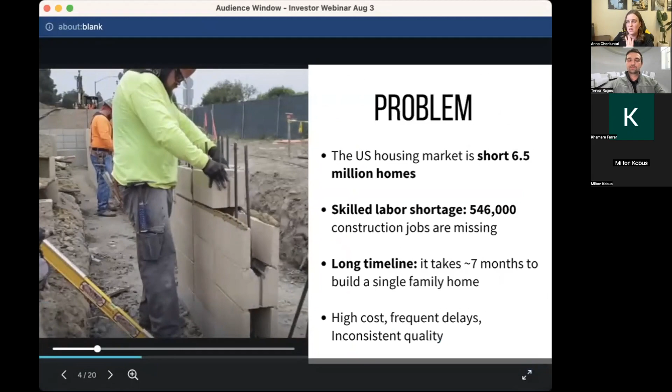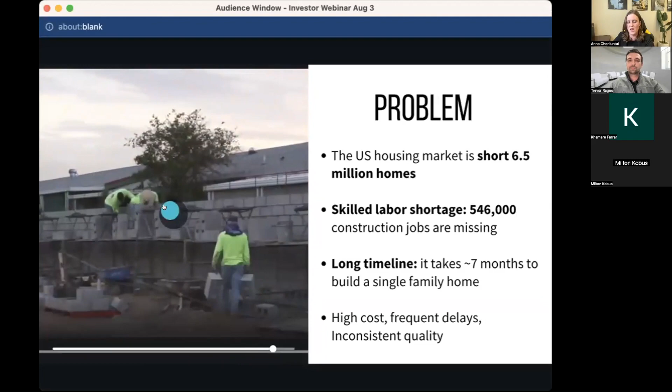Now briefly about the problem, which I believe you're all familiar with: traditional construction technology takes a lot of time, has inconsistent quality, and heavily relies on skilled labor. Home builders really struggle to consistently have available trades on site - they may have 10 people working today, but nobody shows up tomorrow or even picks up the phone. So they constantly battle this inconsistent construction flow and process. We believe there has to be a better solution.

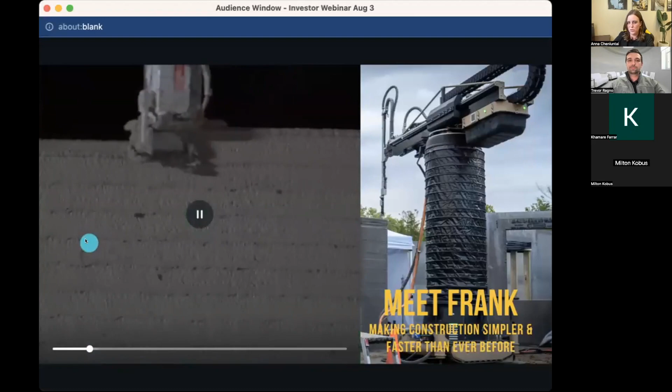This is why we created Frank. Frank is the construction 3D printer, which is highly mobile, very transportable, and only one person is needed to operate Frank and Gary - Gary being our proprietary mixer. We name all of the robots we create: we have Frank, Gary, and Mary.

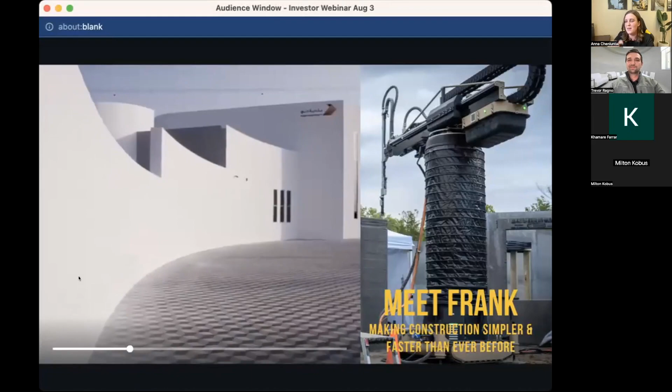Mary, it's a big bulk truck that delivers the material to the construction site.

Using our tech, we 3D printed the Guinness World Record building. It's a 2-story large administrative building, and nobody still can beat this Guinness World Record.

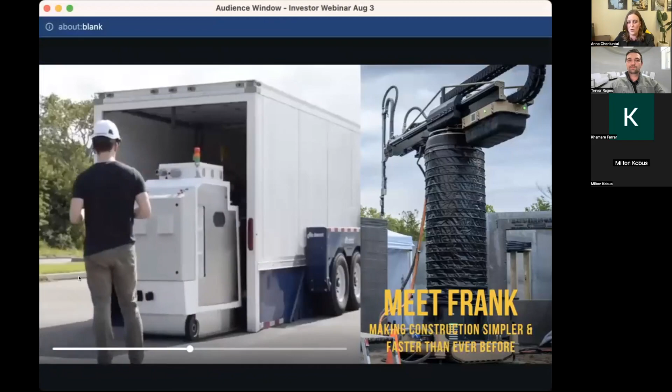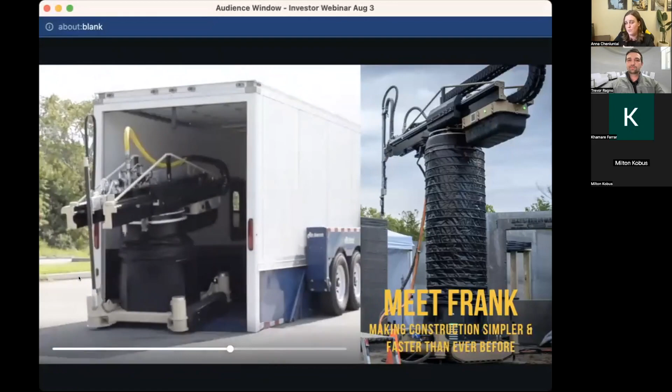Here you also can see how easy Frank and Gary can be deployed and transported using a regular pickup truck and trailer. Just one person is needed to do that, using the joystick and iPad. This is something that fundamentally differentiates us from all other solutions on the market.

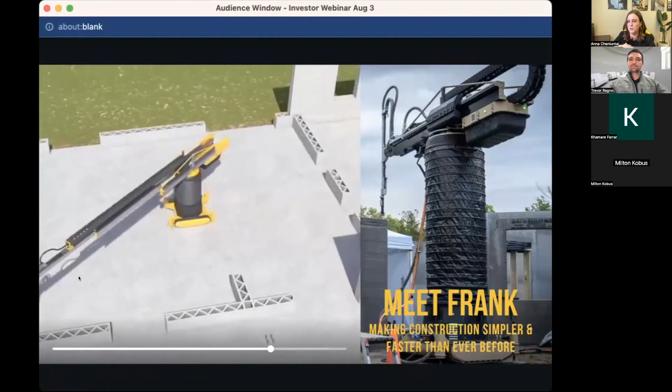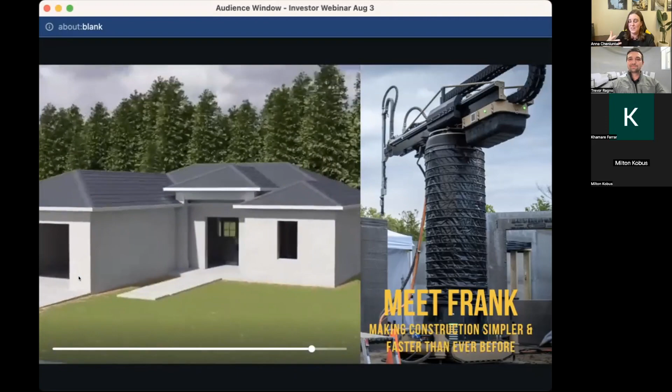Here you see how modular the 3D printer is. Basically, there's no such thing as a problem size-wise. This is a big building for Frank - it could be a 1,000 square foot building or a 10,000 square foot building. Frank can 3D print any of that, due to the mobility and how agile the system is that we created.

Using our solution, home builders significantly reduce the need for labor. It's one person to operate Frank and Gary instead of a 10-person crew on site. More importantly, Frank is available every day, 24/7, and Frank does not cancel the job.

The houses can be way more affordable to build. We estimate up to 20% cost savings for a finished house using our system. And it can be faster - we estimate it's going to be 2 months to complete the house instead of the 7 months it takes right now using traditional construction methods. And it's consistent quality, zero waste, and less logistics.

All of these numbers are really applicable for our solution specifically, because of how easy the printer we developed is to use - and Trevor is going to tell more about this - across all of the items of the costs of operating and using our system.

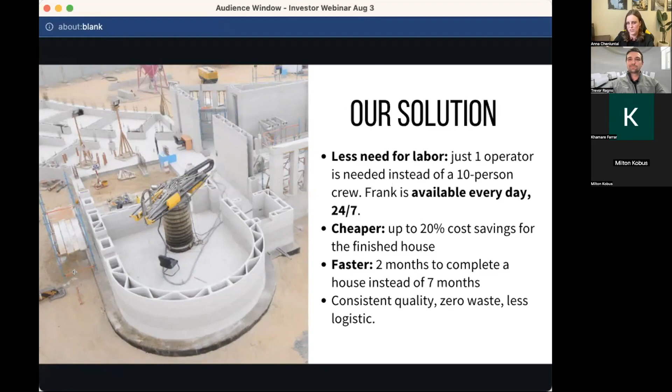Here you see the Guinness World Record building and another building we 3D printed in Florida. Throughout our journey, we built and developed almost four iterations of Frank. The old Frank was really big and bulky and not that mobile, but it still 3D printed the Guinness World Record. On the right you see the most advanced and recent version of Frank, which right now is actually on the market for home builders.

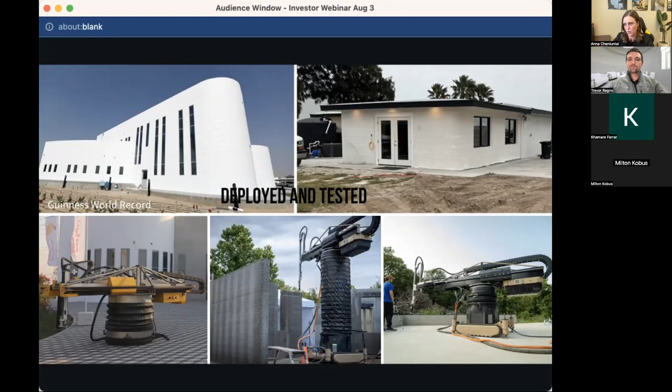Our business model is that we position ourselves as a technology provider for home builders. We are in a B2B business model, and in a nutshell, it's basically the razors and blades business model on steroids. What does that mean? We provide robots for renting, and then we sell our 3D print material for users of our 3D printers. Robots are razors, and 3D print material is blades.

Just estimating the market for this specific business model, it's going to be more than a $60 billion market opportunity for our specific technology and business model. How we calculated it: we basically saw how many residential houses are built annually in the United States. Let's assume all of them would be 3D printed - that would be the market opportunity for us.

Then we saw how many active home builders and construction businesses exist today in the United States, and we multiplied that by annual rental. That would be the market opportunity for us just for the robot rental.

Now hear more about the 3D print material and the goal for this business model, how we're going to achieve specific milestones by 2027. Our goal is to have 400 printers in operation, and we know the conservative productivity of each printer. If all of these printers work even 8 hours per day, they will need 3 billion pounds of 3D print material annually. That equals 20,000 single family houses, which is just a fraction of the current market in the United States - about 1.5% of the single family construction market today.

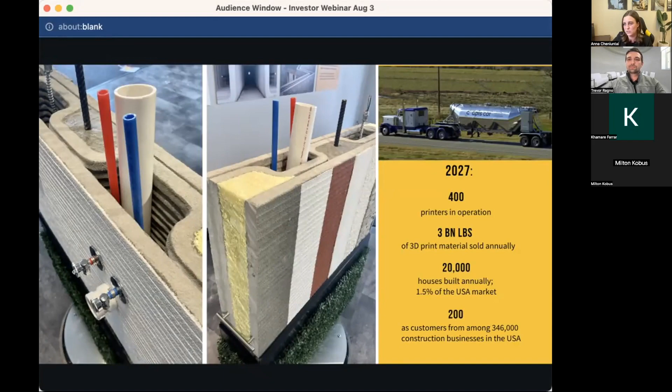To achieve that, we will need 200 home builders actively using our printers, considering each of them using 2 printers. However, we already do have potential customers who want to purchase 10 printers, so even to achieve these numbers, we may need an even smaller number of home builders actively using our system.

And 3D print material - I know a lot of people want to know what 3D print material is and how different it is. It's basically concrete-like material, but it's not the concrete you see poured on construction sites, on construction slabs, or on roads. That material is basically a puddle - it's very liquid, and it cannot be extruded.

Our 3D print material is basically a proprietary blend: sand, cement, and secret sauce, as we call it. Secret sauce is the combination of components that makes the material extrudable, printable, and also gives it all the physical properties required by building codes. This secret sauce consists of existing components already used in concrete and construction. The magic behind this is basically what exact components you use and what the ratio between them is.

Because sometimes if you add some of the components, let's say 1%, and then add 1% more, the entire material is going to look completely different, and you will not be able to print. So there's quite significant material science behind that, and we're really proud that we spent a lot of time to figure out the best formula for this.

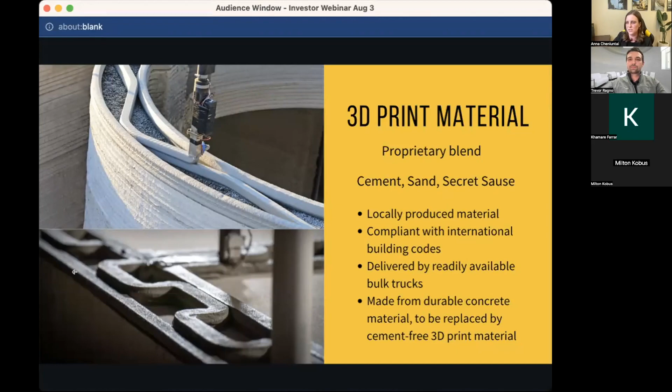We accumulated significant experience in that. And in the future, we even plan to transition to cement-free materials. We already tested it, and that will allow us to reduce the carbon emissions and CO2 emissions during the construction process.

I also know some of you asked how the user is going to make money and why it makes sense to introduce 3D printed walls. Basically, the construction of the walls can contribute to almost 40% of the overall cost of the house. That includes all of the labor, all of the materials, concrete blocks or other materials just to build the wall, then the reinforcement, insulation, all of the stucco, all of the paint, everything just to get the wall that people want to live in — not just the ugly concrete wall.

Using our technology, we can reduce the cost just to build the walls by up to 46%. And that will contribute to overall cost savings of up to 20%. I'm saying 'up to' because it really depends on the design, on the location, on what systems you want to use, what finishes you want to use. This is really generic and average, but it provides a big picture of how the economics of walls play a role in the overall cost to build a house.

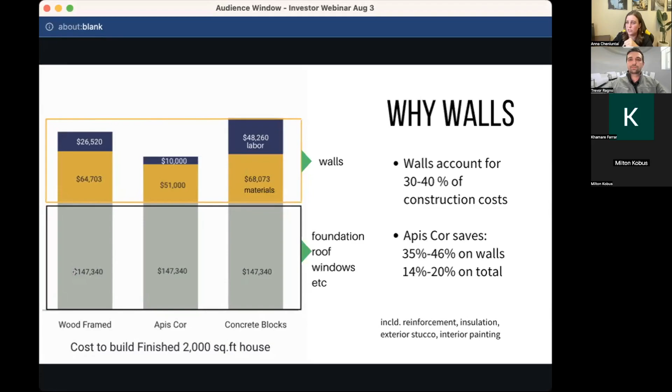Again, these numbers only apply to us, to our technology, because first of all, on the left is the quality of walls that we print, and you can see how straight it is. We don't have these sausages and all the grooves between sausages. On the right, for example, you see walls that other technologies mostly print — and it's not even the most ugly walls that exist today in the industry.

When you have all these grooves and big layers, first of all, you need to spend way more materials and labor just to smooth out the walls, because you need to fill all the grooves with stucco — you can use even 3 times more stucco than needed for our wall, for example. And then you spend way more 3D print material — you can see how big the layers are on the right pictures. Our material, our layer, is very compact.

Because we're really fighting a lot over the economics, a lot of numbers and money, on how to save on the 3D printed wall. The goal is not just to pour a lot of material, but how to actually use less material while still having a structurally safe and sound wall. So there's a lot of engineering behind the actual wall and what the material is and how big the layer should be.

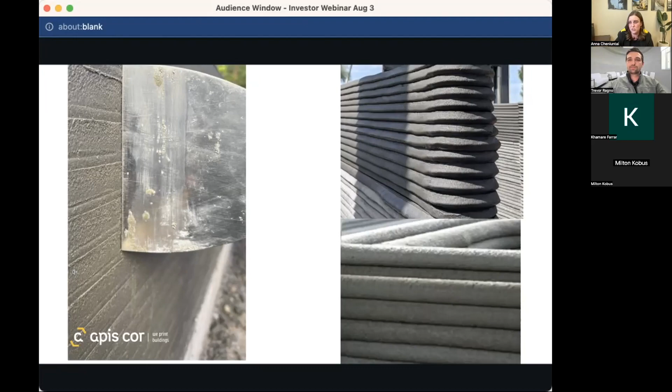That actually works, but the economics behind this is completely expensive because you need about 3 18-wheelers just to deliver parts of this gantry printer, and then about 10 days, sometimes even 14 days, and about 10 people just to assemble this together and get the system up and running. I'll leave it to Trevor to tell more about this, but I just wanted to demonstrate how much smaller our system is compared to other systems.

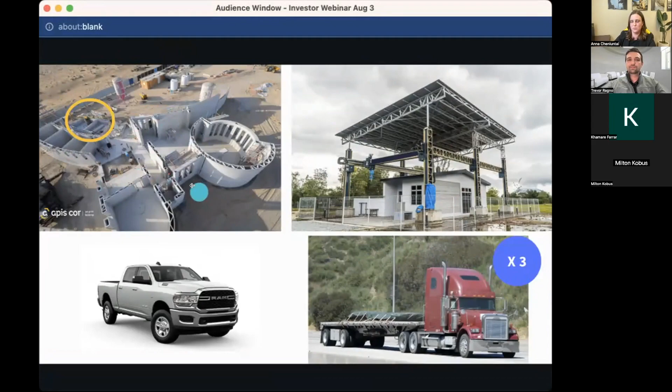And again, for our Frank, we could even 3D print a building 10 times bigger like this because we just move the printer and keep printing the walls.

And I'm sorry for the sound. I'm going to show you the... Trevor, is it very loud? I don't hear very much on my end. That's fine, I think we can get the idea here.

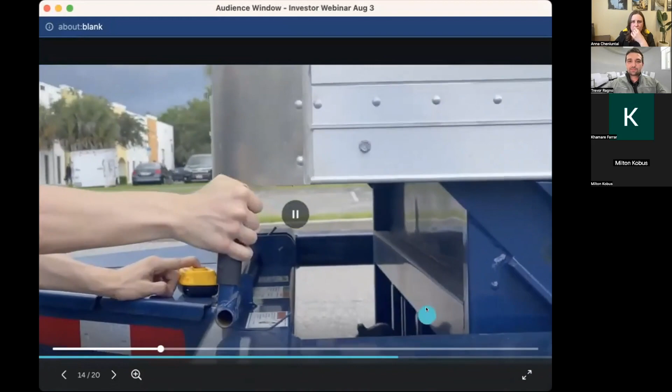Yeah, on mine the video looks a little stop and start, but essentially this is just a consistent timeline showing what it looks like to get out of the car, unload the mixer, and unload the printer.

So, basically, because I forgot to turn off the sound, I don't want you to be overwhelmed with the video. This video shows how Frank and Gary transported by pickup truck and trailer can be easily unloaded by one person using the iPad you see right now on the screen. So we'll just keep watching this video, but it really provides the idea of how agile, compact, and easy everything is with Frank and Gary. And you can see that they're all mobile.

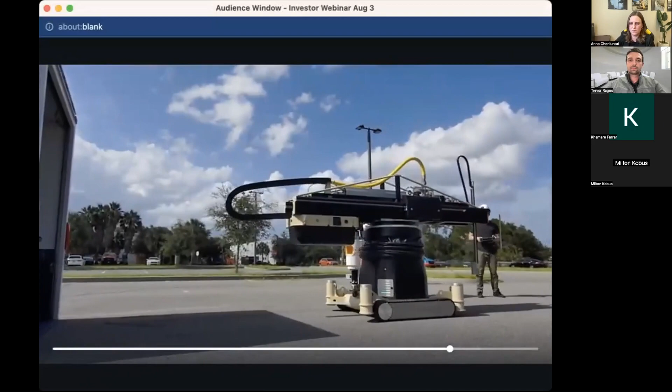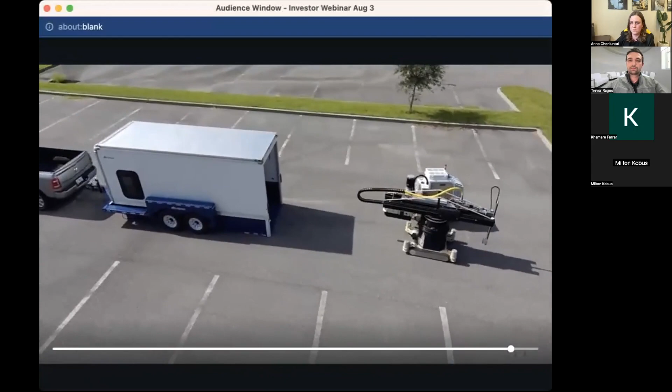Yeah, so that's basically everything an operator or home builder will need to use our system. And these two small and compact little tanks can 3D print walls of any size of the building. I think that's really fascinating — it's a tool that you can easily use to build buildings.

It's not like this heavy gantry, something that makes the cost to build a house 10 times more expensive. It does not make sense at all. So you can see how different we are.

And hear more about our company updates. So first of all, about sales and product presentation.

As you may know, we started our commercial launch in late January this year. We started offering Frank and Gary for sale to home builders in the United States and worldwide. The interest and demand was very overwhelming. We already made 2 sales, and we sell Frank at $650,000.

We also collected 26, and today it's even more, paid reservations for Frank and Gary. Each reservation costs $3,000. So it's not just empty promises — people actually want to purchase the Frank and Gary at this price with this lead time.

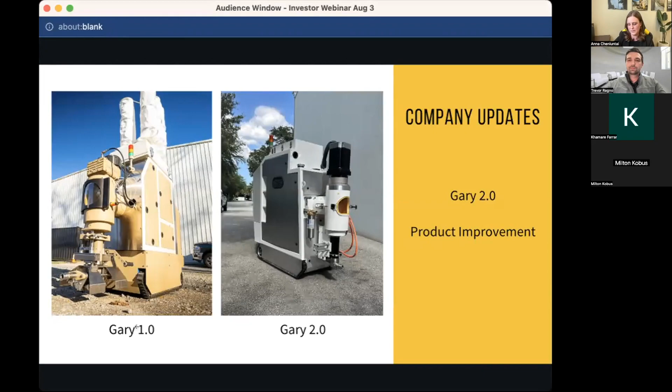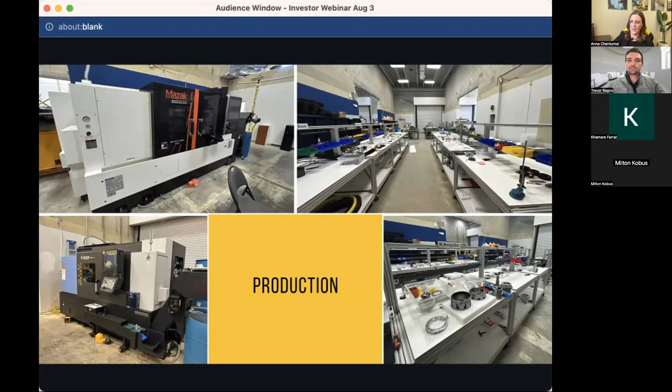Our production facility has significantly expanded — our pilot manufacturing facility here in Melbourne, Florida. We got a couple of brand new CNC machines and a lot of tools. We improved our space because we're preparing to manufacture more printers. All the investments we raised so far were really instrumental to get this done, and we're really excited about expanding our manufacturing capabilities.

What's going to happen next? We're currently working on building our model house. After the model house, we're going to build more pilot projects with home builders, our early adopters, in Texas, Florida, Louisiana, California, Montana, and South Dakota.

But the model home is first before we go into anything else. It's about 5 minutes from our headquarters, and we're going to test a lot of different techniques and improvements there. After that, we'll be ready to print houses without any stops — that's our goal.

With the model home, we're almost done with the building permit. Some of the hurdles were really hard to believe — it was the septic permit, and Trevor will tell more about that. It's not even about the 3D printed walls or technology, it was really septic permits. We spent maybe 3 weeks figuring out how to make it happen, but we solved it — just a couple of last papers we're waiting for, and hopefully we'll get our building permit soon.

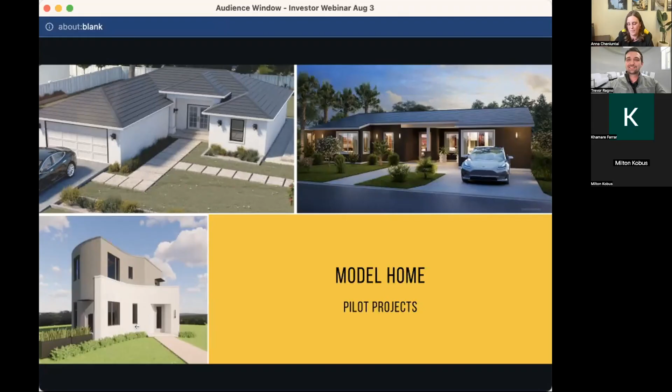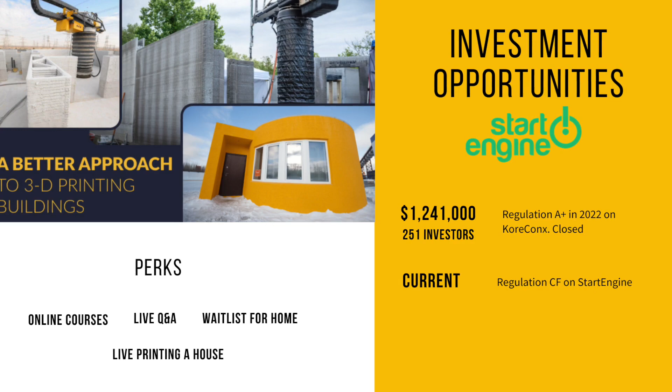Right now we have Regulation CF on StartEngine. Thank you all who invested in us and believed in our vision — that really means a lot for us. If you invest, we have a bunch of really cool perks: free online courses, live Q&A with me and Trevor, kind of different from the webinars. We also add you to a wait list for a home at no cost — it normally costs $200, but investors at a specific tier get it for free. And for a very high tier of investment, you'll be invited to the live printing of a house.

So that's basically it, what I wanted to share — company updates about us. Now I'm going to pass it to Trevor, and he's going to talk more about the technology and the competition, things I maybe touched on slightly, but Trevor will tell it in a more compelling way.

Well, I'm not sure about more compelling, but I'll certainly make sure we can cover some of our bases on those really popular questions people have. Thanks so much for the introduction there, Anna.

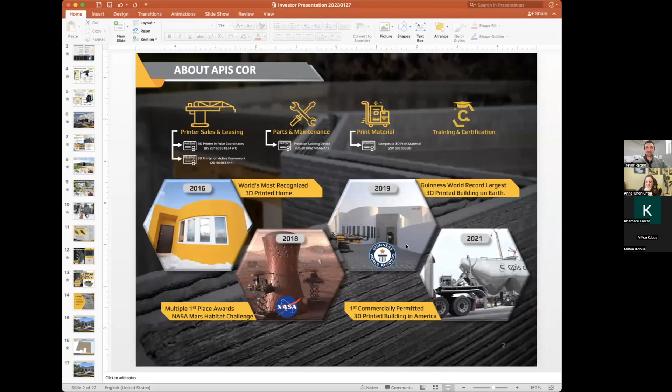Right off the bat, if you've been following us for a while, you might be familiar with some of our projects, things like one of the world's most recognized 3D printed homes. We've really been involved with NASA, one reason why we're here in the Space Coast. We've won multiple first place awards at the NASA Mars Habitat Challenges.

Anna touched on the Guinness World Record that we set back in 2019. But things like having the first commercially permitted 3D printed building in America really show that we're able to get traction, get permitted, and get deployed pretty easily.

Of course, we have some patents you can learn more about on our website, or check it out on USPTO. We'll talk about that in a bit, but just want to make sure we have people in this meeting with different levels of knowledge about construction, how it's done now and how we do it.

So just to make sure we're on equal footing, looking at traditional construction, something I definitely experienced out in the field a lot was human error. Human error is one of those things that's pretty inevitable, and it's pretty expensive. When you build something and have to demolish it, you've wasted your time, you've wasted your labor.

And if you don't demolish it, and you continue working around walls that aren't perfectly straight or plumb, it really affects every other contractor down the line. Your flooring guy has to make adjustments. When you're doing baseboards, crown molding, kitchen cabinets, drywall, and everything else, every other contractor is making adjustments. And that requires an extra level of skill.

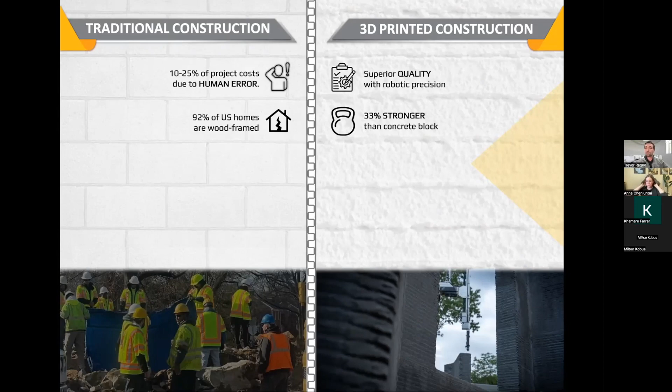We here in Florida are really big fans of concrete because of the extreme weather events we experience, and because of savings in terms of maintenance and HVAC. So we build out of something that's essentially a high strength mortar or concrete. It's about 33% stronger than concrete block homes already on the market. So something that's really great for those home buyers.

As a builder, delays are one of those things that everybody's facing, especially in a post-COVID world. Right now, median delays out in construction sites are up to and around 200 days. So not only are you able to build faster with a printer, but even more importantly, you're able to know before you ever step foot on the construction site how long it's going to take to build that home down to the second.

We know exactly what these printers are going to be doing while they're out there. So this makes it really easy to schedule those subcontractors and keep construction moving, and ultimately just reduce risk to your timeline and your budget.

Now, there's definitely a lot of environmental concerns around the construction industry. Part of that's because construction and demolition waste is by far the largest contributor to landfills. So using a technology that's not reductive, you aren't cutting 2x4s and sheets of plywood. You're adding only the material that you need. So it's zero waste, it's all electric, and the material we're using, including the steel reinforcement, is fully recyclable material. So definitely something that can help create a greener home.

And one of my favorite things here on the design side is this architectural freedom. You see a lot of homes out there with straight lines and hard corners, and that's not because there's a lot of straight lines and hard corners in nature, or because we just like them more. It's mainly because that's how the materials come—your straight 2x4s, your straight pieces of lumber, your square blocks.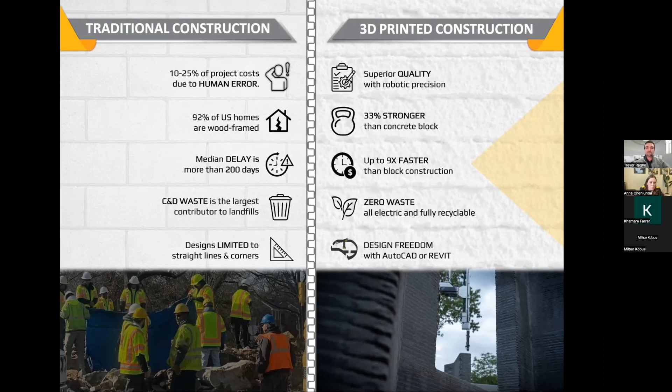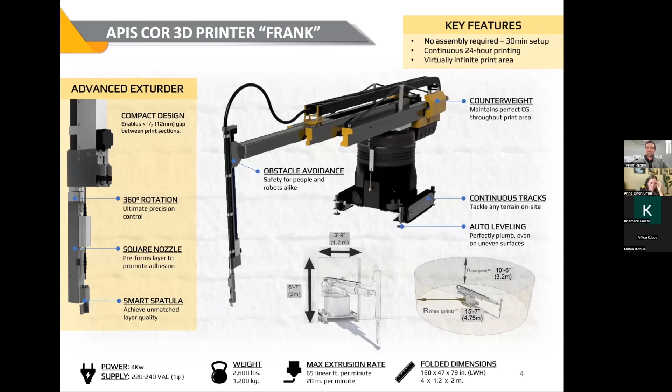Here's a little bit more on Gary. Gary is this mixing machine that we use, and most of the industry out there, they're using plastering machines. These have been around in construction for a while. It's something that's a massive headache to use. Creating our own mixing machine was a real way to avoid having to use these. They're expensive, extremely difficult to clean, and they need to be cleaned very often. We often have to use things like sledgehammers to break off cavity pumps and actually get them open and clean them.

So moving over to a technology that now, the Gary 2.0, kind of the second generation, has really helped us because the mixer is the brains of the operation. The printer gets all the glory, but at the end of the day, the printer's only as good as the material that's going to it. So having Gary constantly monitoring the water temperature, the environmental conditions, the print speed, Gary is really the brains of the operation, telling the printer what to do and anticipating what's going to happen before it even gets there. So these are some of the reasons why the quality of the wall is so high.

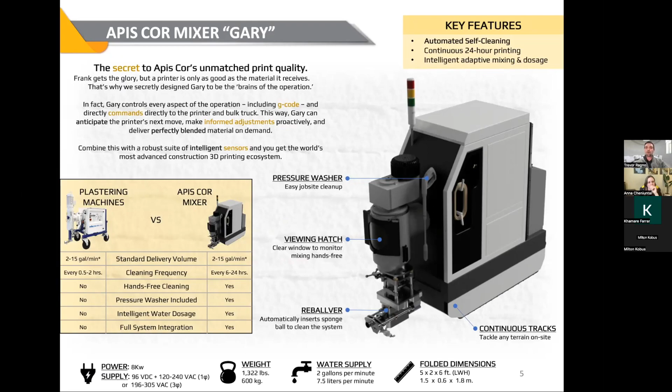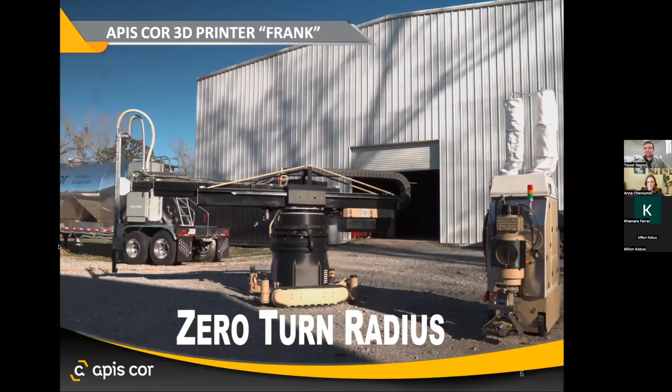So here's Frank in action. You can see him on his continuous tracks driving around. And here we're seeing things like cutting some very tight corners. The spatula helps us to do that. I know some people are a fan of curved walls, and some people just want something that looks exactly like everything they've seen before. You can do really both with the printer. And of course, the consistency of the walls is something that really stands out in the industry.

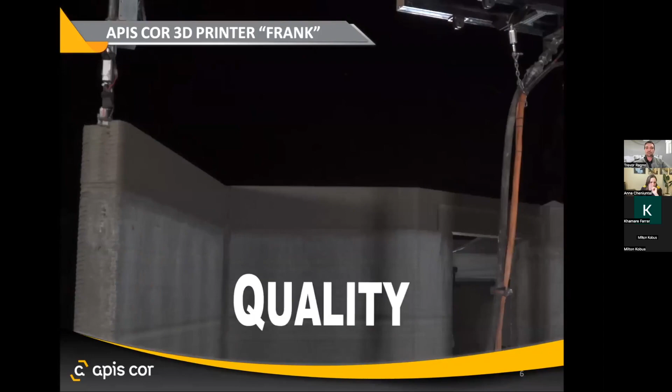Let's see what we have here.

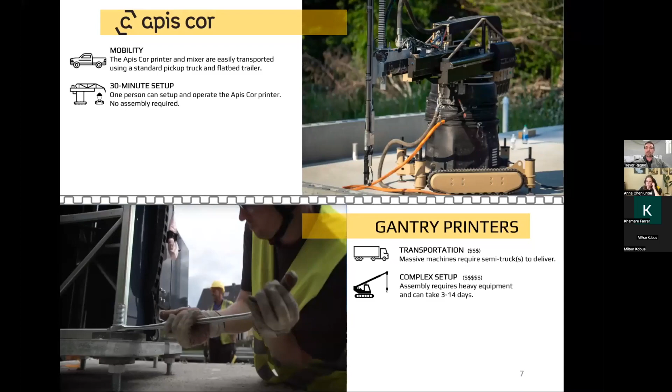Anna touched on gantry printers briefly earlier. 3D printing right now and for the foreseeable future is a really hot technology in the construction industry. There are other companies in the space, but the vast majority of them, like some of the ones mentioned earlier in the question, are mostly gantry printers. Again, massive machines, very expensive to transport compared to a more mobile technology. That setup time for gantry printers, not only is it kind of dangerous, using cranes, climbing up on large truss systems to try to bolt everything together, but you're also working with a pretty large crew in that process, not only while building the printer, but while operating it.

Oftentimes you'll see a lot of larger crews out there helping to support those systems. Part of the reason doesn't really have much to do with the printer as much as the mixing machine and the ability for these systems to really work in harmony to deliver that building at the end of the day. And of course, scale here.

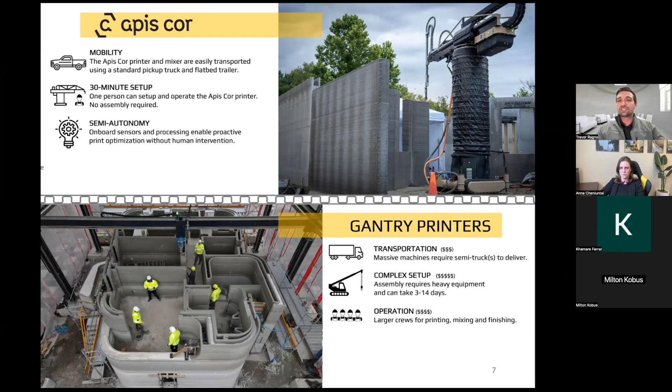When it comes to whether you're looking to print an affordable home, an affordable complex, or even something on the more luxury side, being able to scale and take advantage of some of those unit economics is something we're able to do on virtually an infinite basis. The main restriction to the size of building you can print with our printer is really the land you're printing on. When it comes to gantry printers, you really need to build inside of that box, so the bigger the home, the bigger the printer. Those are really the main high-level things.

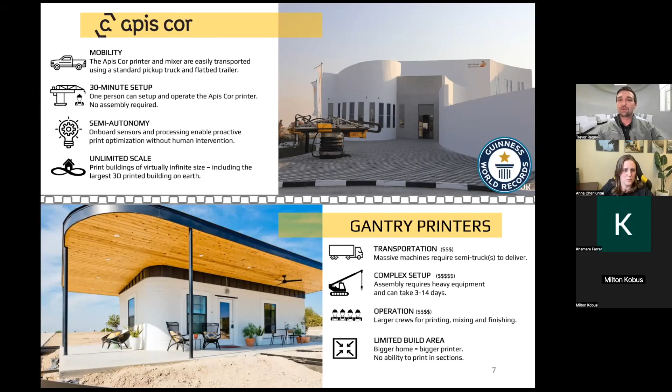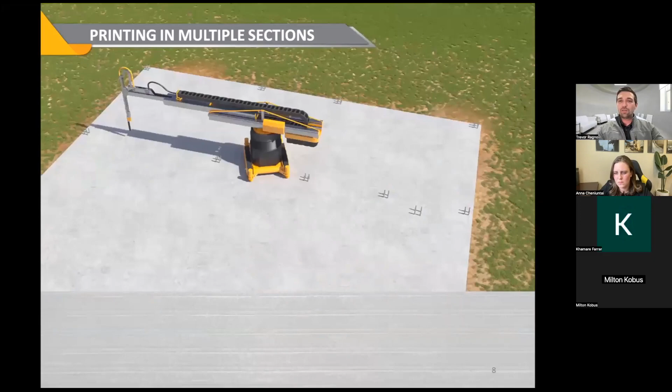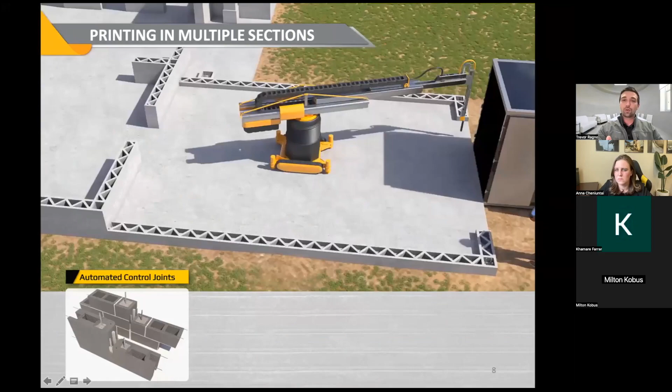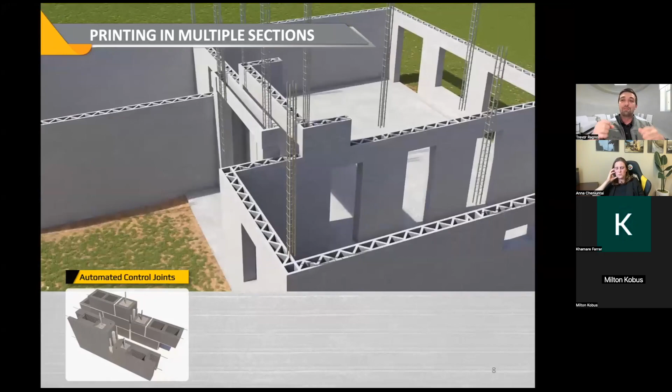So printing in multiple sections, this is how we're able to build these massive buildings. One thing you'll notice is this control joint that's formed between the two print sections. Typically, when doing traditional concrete construction, you have to get a big cement saw out to cut in these building joints—movement joints, things like seismic joints, expansion joints. These are required by building code. So instead of bringing a big cement saw and holding it above your head, we're able to really automate that process.

And there's a lot of other things we can do during the actual print by printing in sections. So after the printer's left section 1 and moved on to section 2, we're already installing outlets, getting reinforcement installed, windows, plumbing, rough-in installations for a number of systems while the printer is still operating. This isn't typically done with masonry construction, but these concurrent activities can really help speed up that construction process. And lastly, operating multiple printers at the same time.

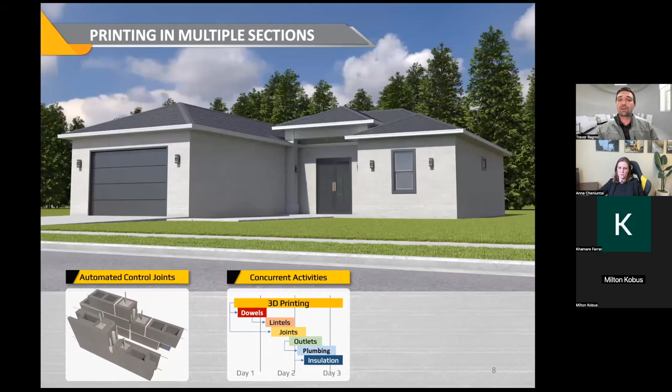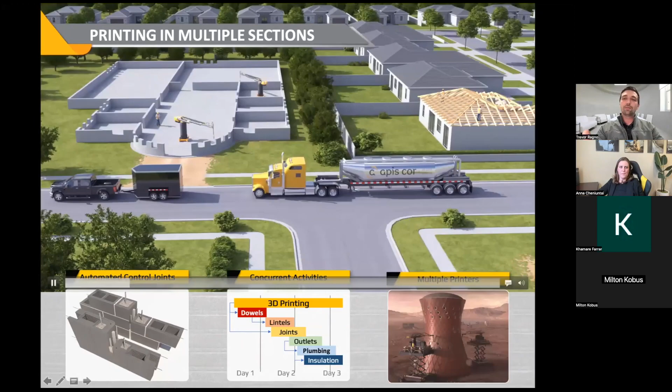This is something we're already able to do, and if you look in the top left, you can see what that looks like. Since the G-code, the printer's language, is broken up into sections, we can already deploy multiple printers, either on different projects or on the same project at the same time.

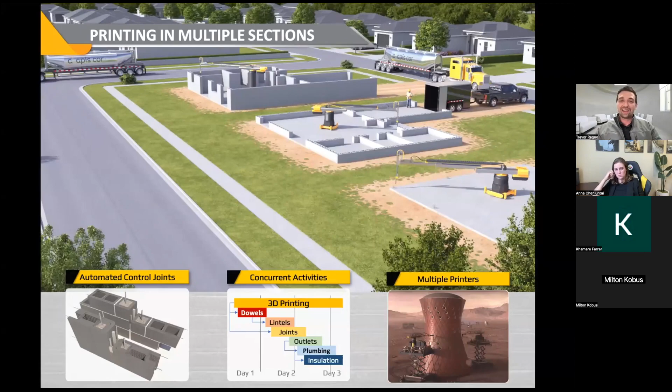This really lends to scalability. If you're a construction company and wanted to purchase one printer up front, you could very easily scale your operations and continue to grow. So one of the big questions we get is around permitting, and our whole approach to the walls we print has been: why reinvent the wall when you can just copy this gold standard of concrete masonry unit or concrete block construction? We really take that to heart.

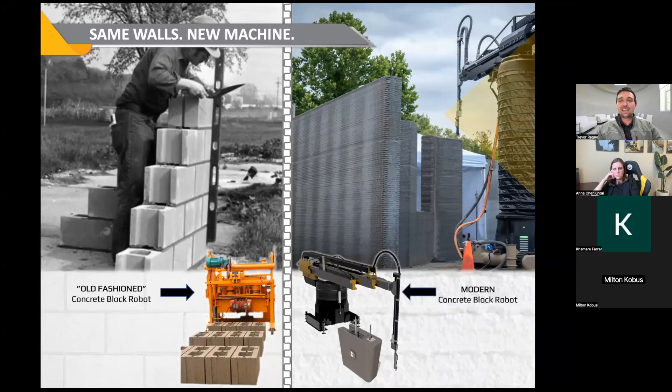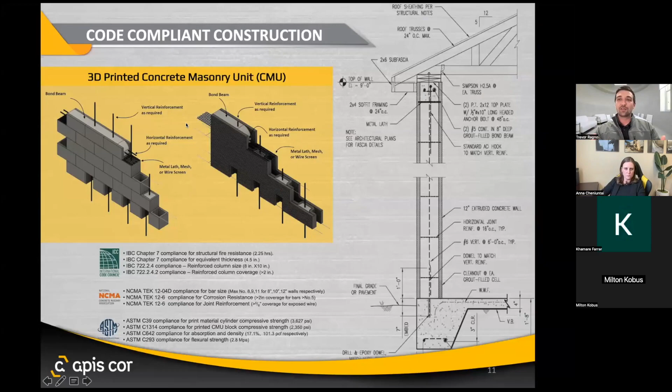So over here on the left, we have two walls. On the left is a standard concrete block wall, and on the right is a 3D printed wall. You'll notice a lot of things are identical about these, like using the exact same rebar reinforcement at the exact same spacing, or using ladder wire at the exact same interval, or things like a bond beam at the top of the wall. We're doing all the exact same things because we didn't want to create a whole new set of building code that we need to wait for people to adopt and for tradespeople to learn.

Instead, we're just copying what's already out there so we can penetrate the market much more quickly. On the right side of the screen, you'll notice a sectional detail you'd see in a set of construction documents. If you've ever seen a sectional for concrete block construction, you'll immediately know this looks identical. The only difference is essentially a squiggly line over here on the right and a little arrow that says extruded concrete wall. This is great because if you have construction documents for a tract home or concrete block home, you're able to quickly convert those into documents for a 3D printed home. So the whole process isn't disrupted here. The architects, the engineers, the building officials, the builders, the tradespeople, everybody's doing the same thing they were doing before, just more efficiently and faster. This is really one of the big reasons why we were able to create the first commercially permitted 3D printed building in America.

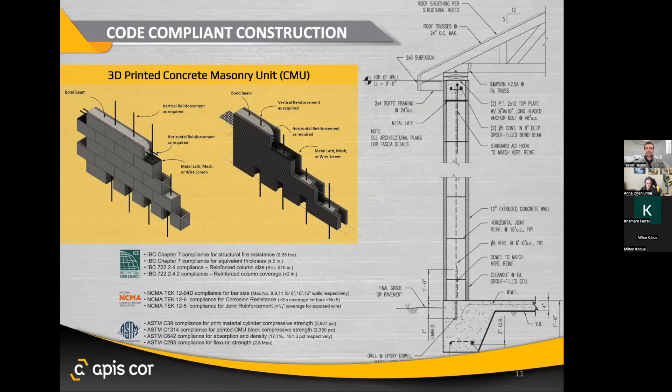So how do you design these things? Most architects use software like AutoCAD and Revit, so we've created plugins for those softwares where you're able to very quickly generate that tool path and create G-code. For those who aren't familiar, the printer, Frank, doesn't speak English - he speaks G-code. That's the printer's native language, those instructions. We have some videos available on YouTube to show you how quick and easy this is, and we're also developing online courses to help make it even easier.

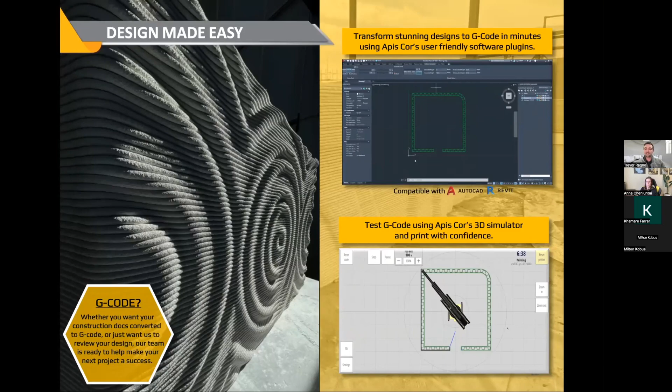Once we create that G-code, we always test it out in a simulator real quick, so there are no surprises when you get out to the construction site. When it comes to the questions we receive, we have more questions on secondary construction than anything else - how are you doing reinforcement or insulation or windows, doors, mechanical, electrical, plumbing? Thankfully, the answer is the same to every one of these questions, and that's that we copy concrete block construction.

So you'll reinforce these walls in the exact same way. Slab connection details, insulation, all of these things are done identically. In fact, you can see in the bottom right here that if you take a concrete block and set it right on top of one of our 3D printed walls, all of the infill, those kind of webbings, everything connects up perfectly. Everything looks very similar. This helps simplify the process and integrate this into your existing workflow as a construction company much more easily. It also helps from the perspective of someone who isn't in construction, maybe a home buyer, get delivered a little more quickly, and you see a very simple process that's easy to maintain after the fact.

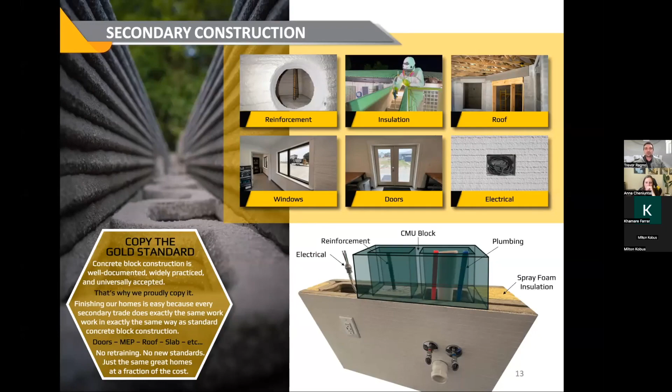So I'll close up here with an update on our model house that Anna had touched on earlier.

So it's going to be a really exciting project. First off, it's going to be the first 3D printed home in Florida's Space Coast, a place that is constantly innovating, and we're happy to be the first here in this area. Now, don't quote me on this, but I think it might be one of the first 3D printed homes, if not the first, in a high velocity wind zone.

So we are going to be building this right through hurricane season, demonstrating some of those capabilities when working in an environment that is pretty harsh. I know there's been a lot of interest from people involved with disaster relief and off-grid construction, and a technology like this really could be deployed in an area like that.

Not only do we have battery power on the bulk truck, but being able to operate with very limited resources is something that's really important for off-grid construction and disaster relief. So we'll be demonstrating how some of that can be done on this project, even if you don't really have access to power or water on the construction site.

When it comes to permitting, thankfully, building officials were very open and actually excited about this project. It's something that is familiar to them, and they understand all the documents, but it's kind of different, new, and exciting in the way that it is 3D printed.

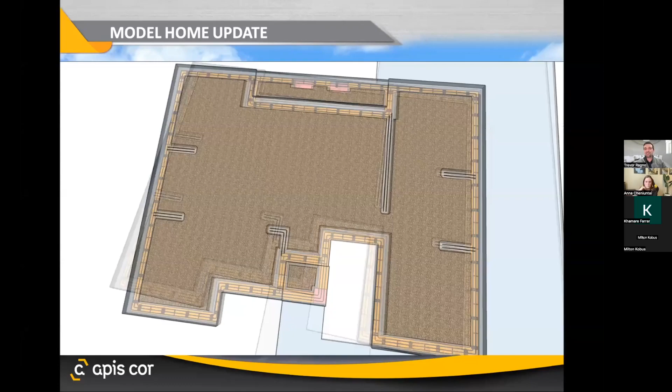We'll be getting the printer out there on that slab, and we'll be doing this in 5 different positions, but you can kind of see what that looks like here. The 5th position really is helping us with a cool feature wall we'll be doing on the inside of the home. But electrical is going to be added.

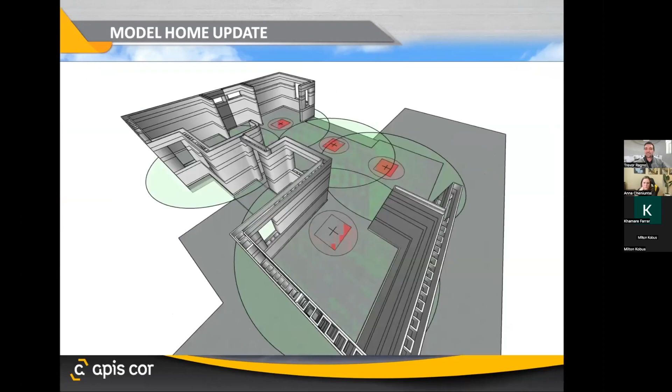We'll have window bucks that are required by code here. We'll have insulation in those cavities, reinforcement, and grout in those wall cavities. If you hide the print material, this is kind of what's inside the walls. But we'll do the code required top plate, very limited framing out there, and of course our roof system.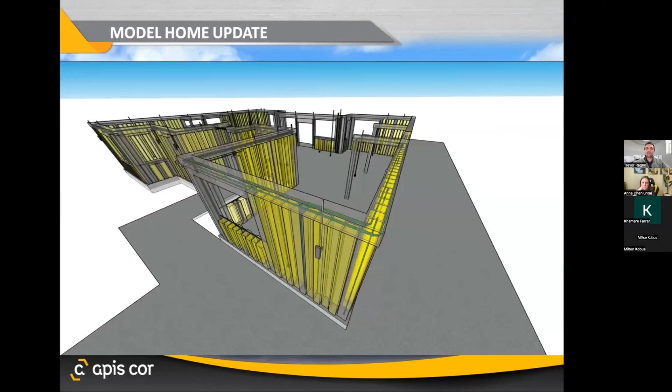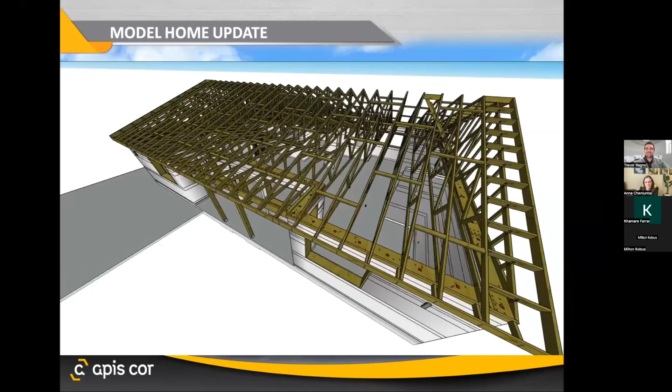We'll get our trusses formed up, our subfascia, our deck. All this stuff is very standard with construction. And then, of course, we'll be trimming and finishing the home out on the inside there. So we'll be keeping everybody updated as to the process that we've been going through.

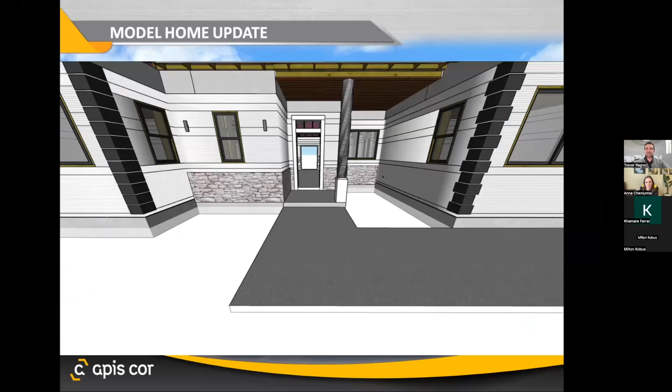Keep an eye on our social medias and on our website, and we'll definitely be excited to share some of this with you guys coming here shortly. So that's it for my presentation here.